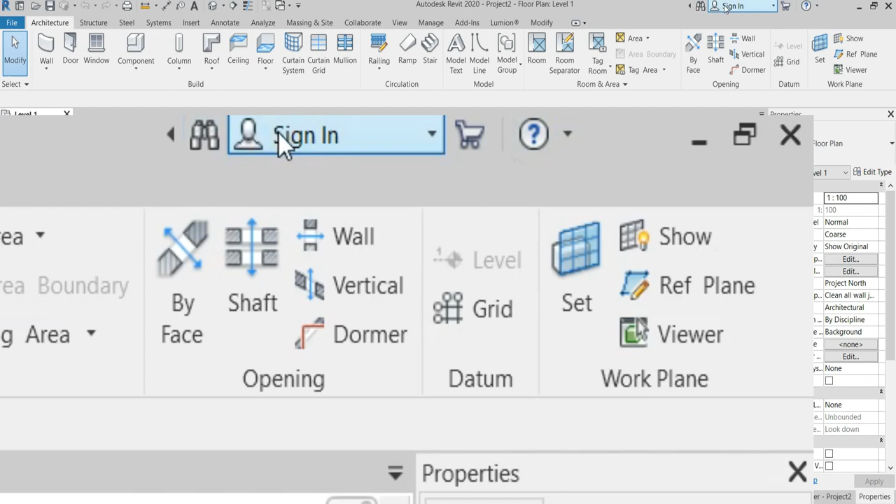These are in the top part of the ribbon. This button is to minimize the window, this one is to restore down, and this is to close.

Just below the quick access toolbar, this is called the ribbon. In the ribbon we can find file, architecture, structure, and similar tabs. There are a few buttons and these are called tabs.

If I click this architecture tab it opens, and if we click structure, this is the structure tab. This is the annotate tab, this is the view tab, and this is the manage tab.

There are a few tabs, and inside those tabs there are panels. Inside the architecture tab you can see some vertical lines which separate those tools. This is the build panel, you can see it like that.

This is the circulation panel and this is the model panel. Inside the structure tab, this is the structure panel. There are a few panels inside each tab.

If I recall the previous one, this is the ribbon, and in the ribbon there are a few tabs like insert, annotate, analyze, and so on. Inside every tab there are panels which have been separated. As an example, this is a graphics panel.

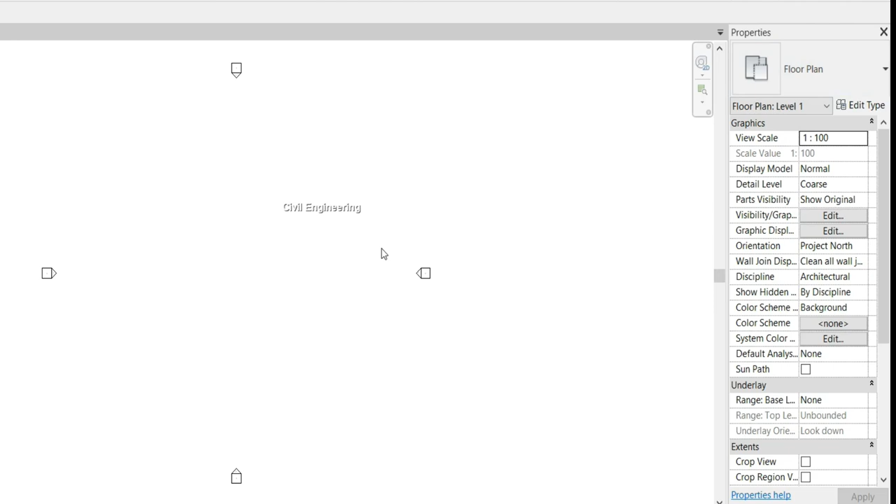You can see that in our default interface there is a palette called properties. Sometimes you cannot see this in the default interface, but most probably this properties palette comes into the default interface. The properties interface is the interface which shows all the properties of the actions or tools we are using.

As an example, if I select the wall tool and draw these walls, we can see every property of that wall in the properties palette. You can see that we can select various walls here. If you are doing something in this white space, we can see the property of that action, tool, or material in this properties tab.

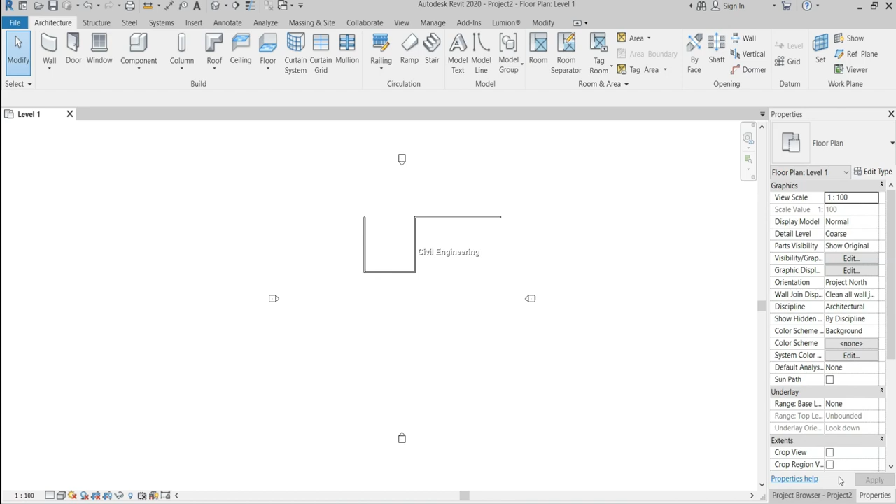In this properties palette there are 2 buttons, one being project browser. Actually this is not a part of the properties palette, it is a separate palette. We can use them combined to save our workspace. I select this project browser palette separately.

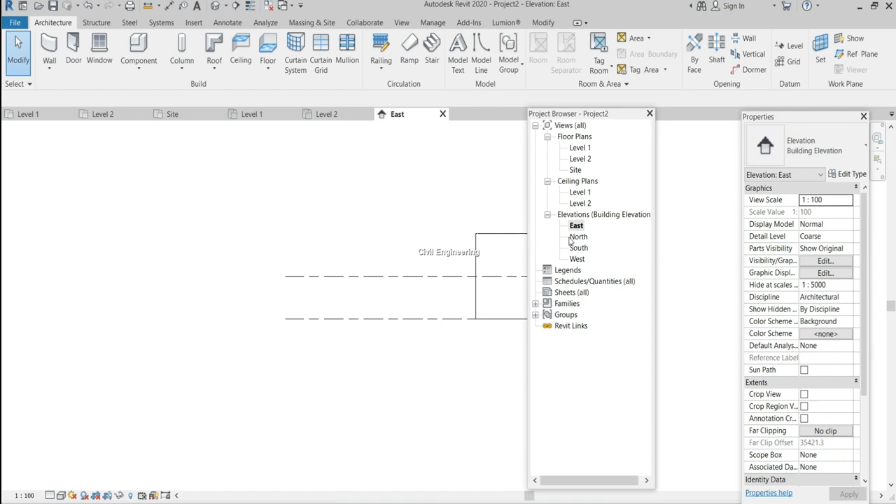In the project browser there are many options like level 1, level 2. I will talk about those things in future videos. We can use our cameras in the project browser palette.

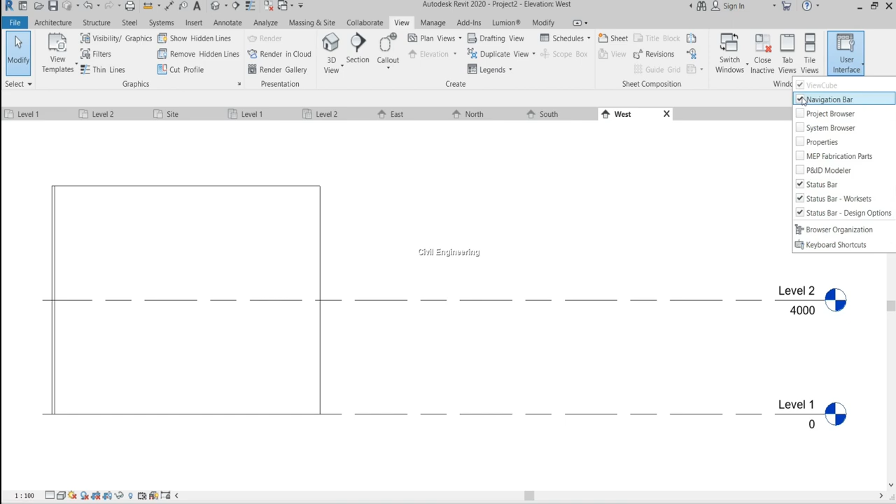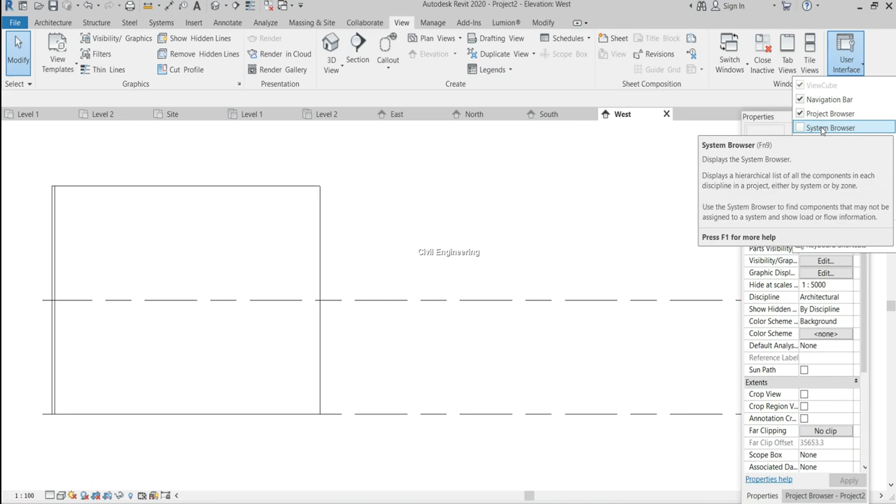If someone cannot see the project browser palette and the properties window in the default interface like this, we can take it into the workspace by using this method. In the ribbon there is a tab called View, and in this tab there is a panel and option for user interface. In the user interface you have to click this checkbox if you need that window or palette in the user interface. If I click this project browser, you can get that project browser into the user interface, and if you need system browser you have to check that checkbox, and if you need properties browser, check that checkbox. There are a few other windows which we can take into the interface, and if you don't need to take it into the interface, we can remove it.

The white space which we see when you open a project is the workspace where we do our models. You can see that there are 4 square shaped items there. These are just like cameras, but if you are opening your project without using a template, you can't see it. I can see these because I opened my project using the architecture template. Otherwise we cannot see these 4 items. These are like cameras in the workspace. This white space is the workspace which is used to model our designs.

And if you need to move this project browser window or the properties window into this workspace, you have to click and drag them into the place which you want.

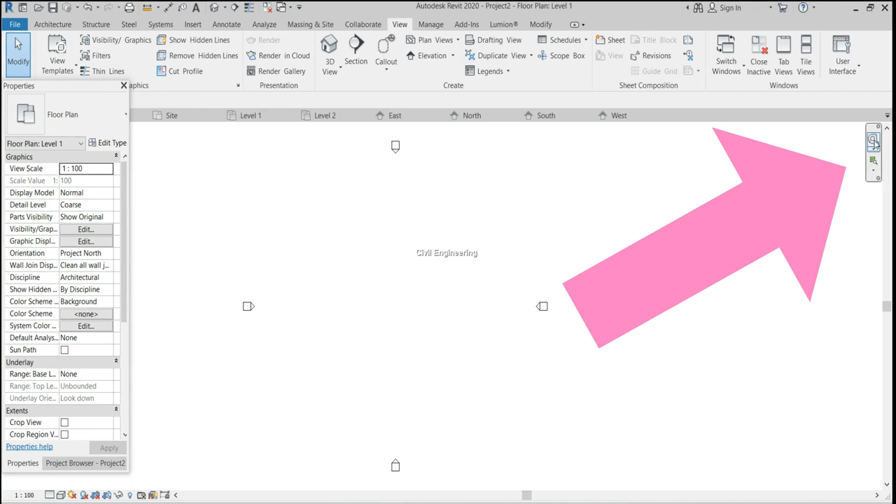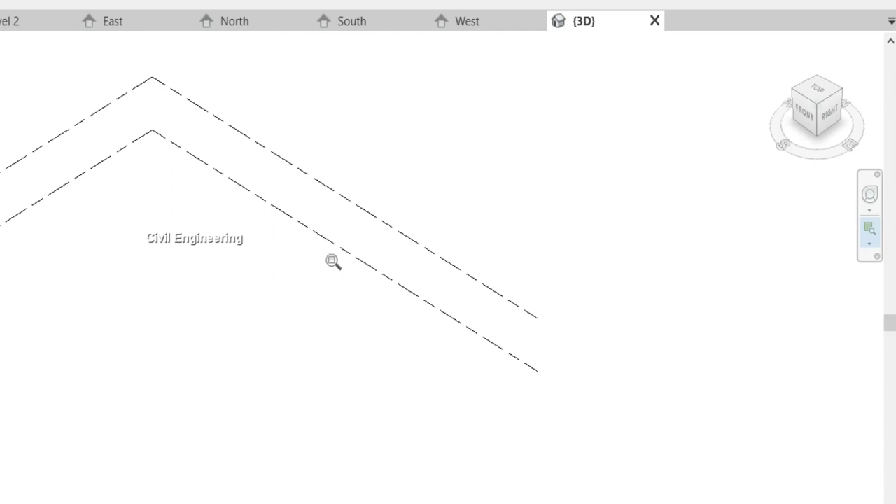You can see that there are a few small bars there. This is the navigation bar. In the navigation bar, these 2D and 3D wheel buttons are there. If you are using 3D view, this is the 3D cube, and we can move that cube by dragging, left click and drag like this, and we can use this zoom option. We can zoom by using that zoom option too.

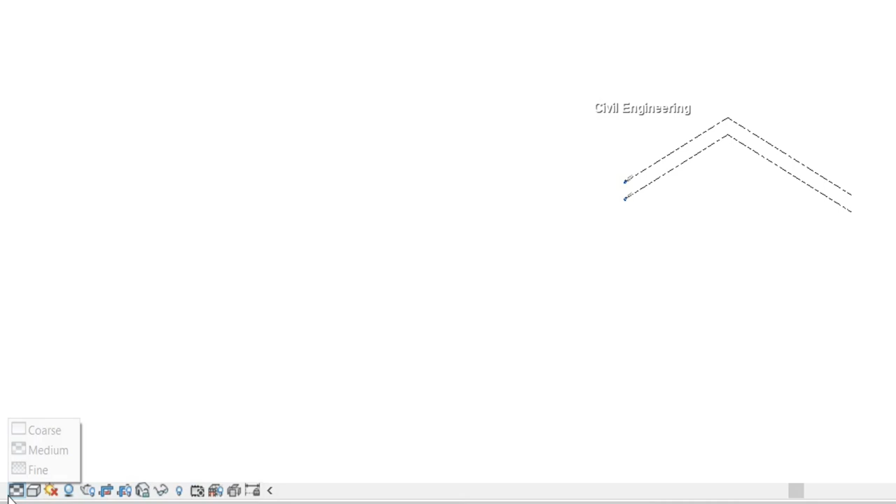This is the navigation bar, and in the bottom of the left part, these are the options which we can use to change our view in the workspace models. We call this bar the view control bar. In this bar there are many options, like you can see coarse, medium, fine. This is the detail method of the models we are modeling in the workspace.

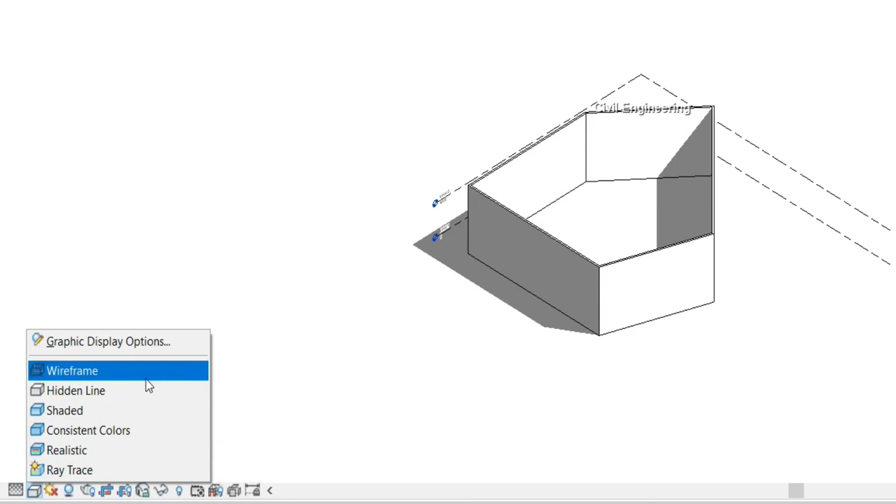If we change this one, we can change into a rough, coarse, medium, or fine method of detailing. And here there are a few options. This is the graphic display options: wireframe like this, hidden line like this. You can see the changes in the model: consistent color, realistic view, and so on. There are many options in this view control bar. If you need to render the model, you have to click this one, and this is the render window. You can also set the sun path by using the sun setting options in the view control bar.

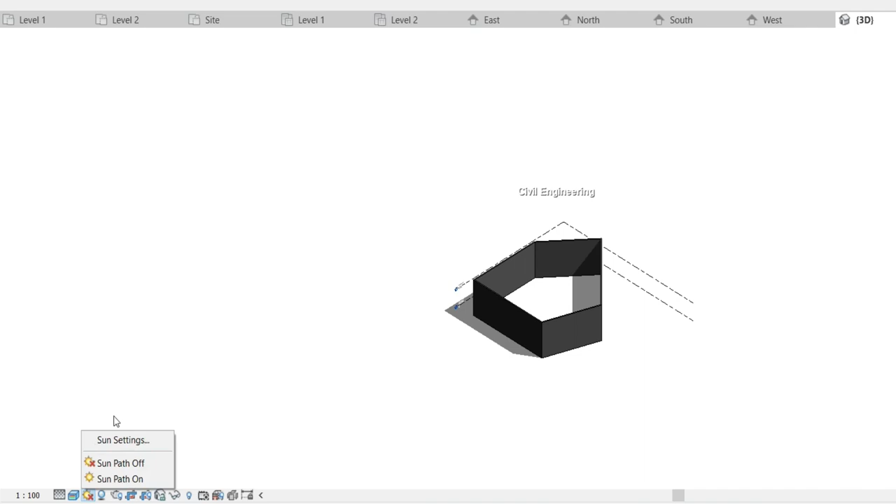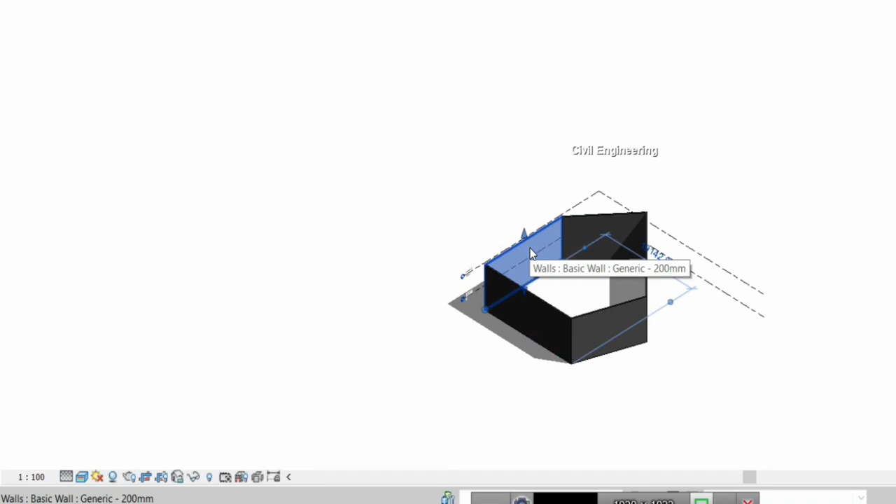And if you are doing something in the workspace, you can see that the bottom part of the left side is always changing. You can see that when I click on that wall, click to select, TAB for alternates, there are a few things in the bottom part of the left side. We call it the status bar. It means it always shows the status of the project we are doing.

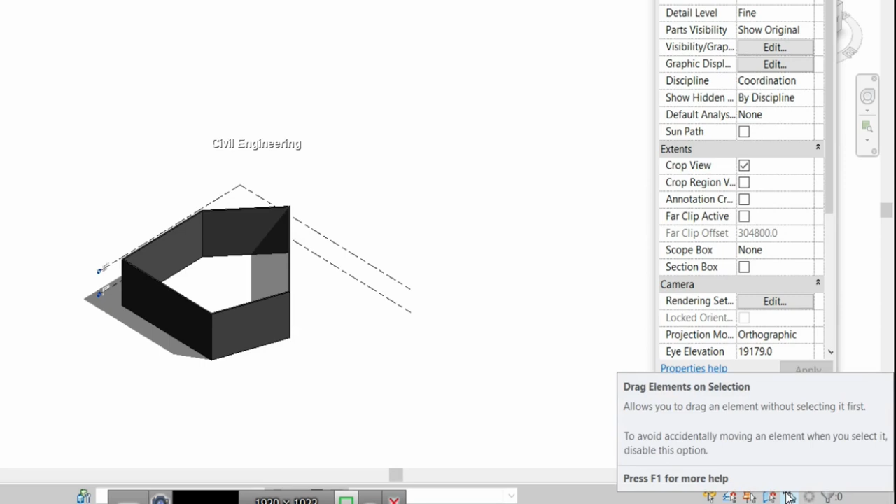And you can see that in the bottom part of the right side, there are a few buttons which we can use in our models, and we call this the selection toggles. By using these selection toggles, we can pin elements and we can drag elements on selection like this. There are a few options in the selection toggles too.

This is a rough idea of the user interface in our project, and I will start doing models in my next video. Thank you.